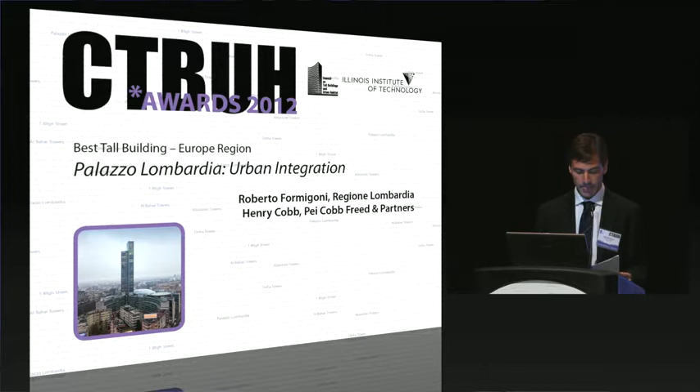Allow me first to say a few words about the region I belong to, the institutions that promoted the realization of this project, the Lombardy region. In this slide, you can see the key points, the key factors of our region.

We have a population of 10 million people. We are a region with a strong economic system. We have over 800,000 companies and about 18,000 foreign companies. The GDP of Regione Lombardia is 20% of the total GDP of our country, Italy. And the region of Lombardy is the leading region in Italy for external trade relations.

These key factors are important because in this context was developed the project we are now presenting. In fact, when we decided to create a new headquarters in 2002, we thought of a building that summarizes the characteristics, the features of our territory.

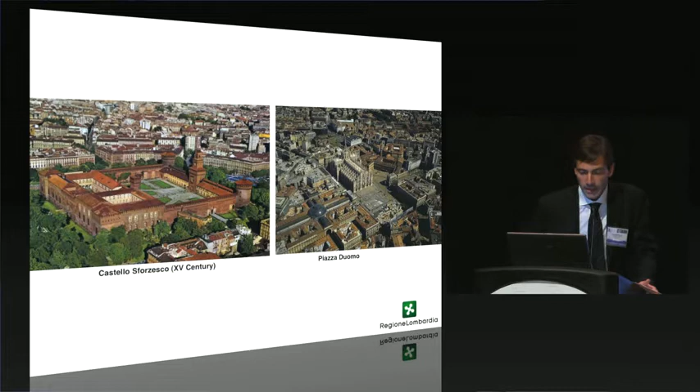Now, coming briefly to the area in which Palazzo Lombardia is located. This area is called Garibaldi Repubblica. It's an area very central, very close to the central station in Milan, and located between two historical districts of Milan. Unfortunately, this area where the building is now located had been abandoned for more than half a century.

So in our idea, and this was expressed in the manifesto, the project of this new building had to be a starting point, a focal point for a complete renewal of this area. We would like to create a building of great quality, a beautiful building, one that could launch this area for other important projects.

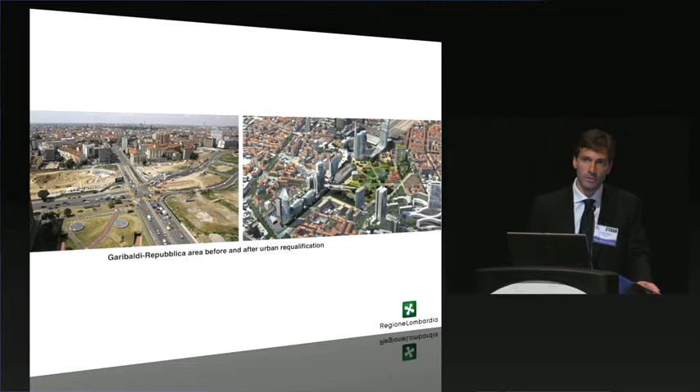Coming to the aspect of the green in Palazzo Lombardia, another important item that we inserted in the manifesto we wrote, including all the criteria. Mr. Cobb will explain this in a more detailed way, and of course in better English than mine. But I would like only to point out that as we would like to reflect our region in this building, we would like also to reflect our deep respect for environmental themes.

In our intentions, the new building had to be an example of the most advanced green practice in both design and operations. We chose technologically innovative solutions, and we would like to create a building that could be a model of eco-sustainable architecture. These innovative technological solutions include: active climate wall, photovoltaic cells, green roofs, and heat pumps using underground water.

We think that in Palazzo Lombardia there has to be a symbol of what we consider the environment, something to protect, but even a strategic resource. This is, for example, the purpose of the linear public park on the west side of Palazzo Lombardia. In this park, we tried to have symbols of the entire territory of the region: water pools represent our lakes, tree-covered mounds represent the alpine foothills, and we put 9 large rocks as symbols of the beauty of our mountains, the Alps.

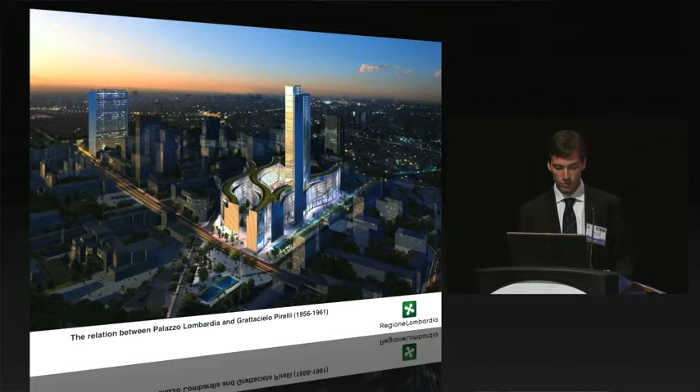Here you see the image of Palazzo Pirelli, the old headquarters, destroyed by an accident that occurred in 2002. Now the building has been completely restored, and it is the place of our regional council, the legislative body of our institution.

Palazzo Lombardia today plays a fundamental role in the city. There is a debate in Milan between those who believe this building does not belong to the Italian tradition, and those who appreciate this experiment. What I can say is that Milan, as I have already explained, has other experiences of tall buildings, for example the Pirelli skyscraper and even Torre Velasca. Milan is now changing, and in the near future the city could have a skyline like this.

But it's important for us to point out that our project is not important only for the view we have from the 39th floor. Here you see the last floor of Palazzo Lombardia. It's important because it is a way to leave an area, a city, more livable, a way in which we tried to help the city better improve its condition, and to offer places for citizens to meet the administration and to meet together. Thank you for your attention.

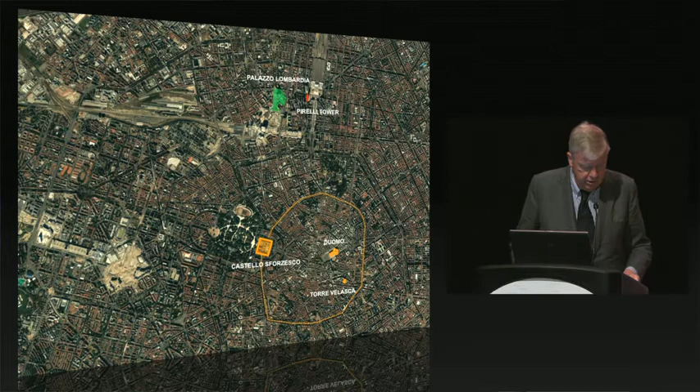Good afternoon. In this aerial view of Milan, we see the site of Palazzo Lombardia in relation to the key monuments mentioned by Mr. Pacca. As he pointed out, the site is located some distance from the city's historic center, in a long neglected district that is nonetheless remarkably well served by public transport, and therefore well suited to the current program of sustainable urban regeneration in which Palazzo Lombardia plays a central role.

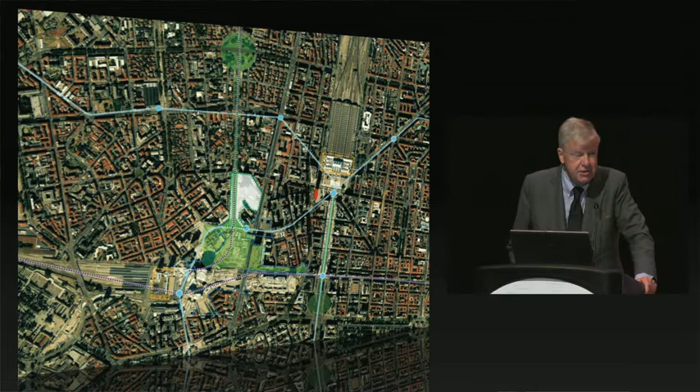The rather disordered arrangement of neighboring residential buildings is the natural result of a confluence of unrelated street grids, with none achieving clear primacy. The challenge then was to envision, on this oddly shaped urban site, a work of architecture that could provide nearly 90,000 square meters of floor area above grade, while also shaping attractive public spaces and fitting comfortably into a neighborhood of mid-rise buildings.

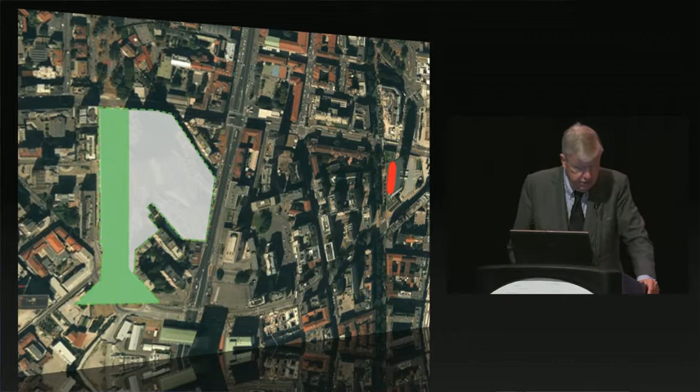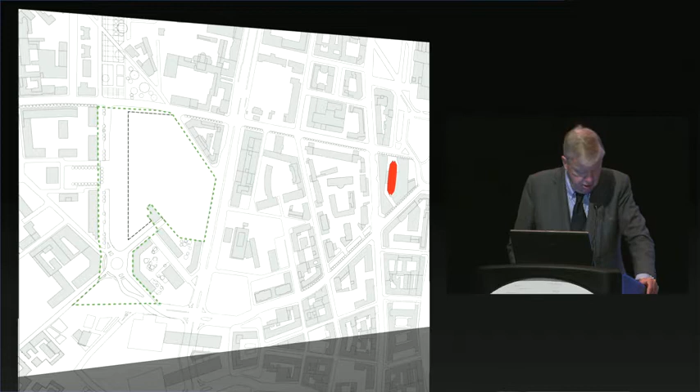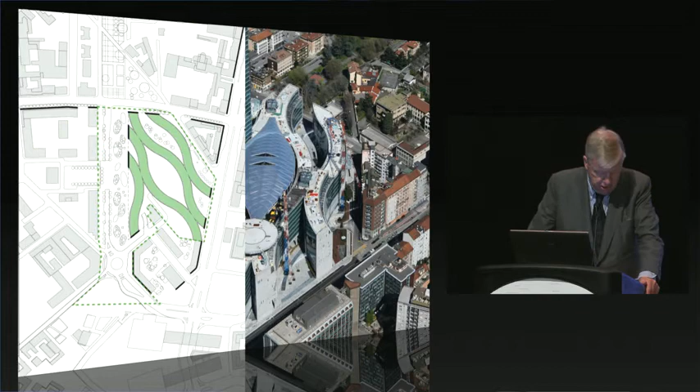We began by imagining a podium structure comprising sinuous, interweaving strands of linear office space, 7 to 9 stories high, whose modest scale relates well to the adjoining residential neighborhood, while their curvilinear forms make reference, here in the heart of the city, to the mountains, valleys, and rivers of Lombardy.

Although seemingly random, these strands are actually the highly disciplined products of a geometric order made up of 22 circles arranged to form 11 intersecting rings.

Fragmentary arcs embedded in two of these intersecting rings then rise to form a slender bifurcated tower. At a height of 161 meters, the tower contributes an emblematic presence on the skyline that is explicitly complementary to the neighboring Pirelli Tower, heretofore the tallest building in Italy.

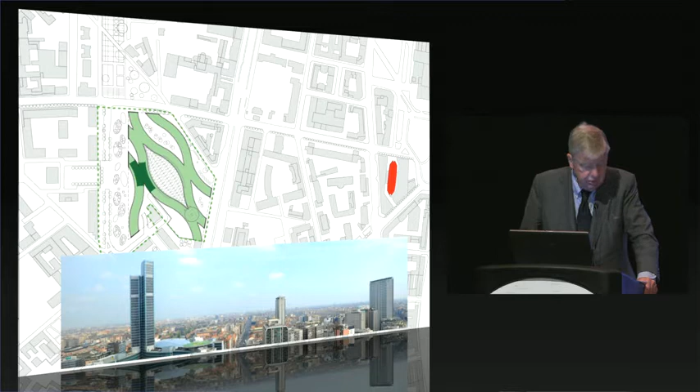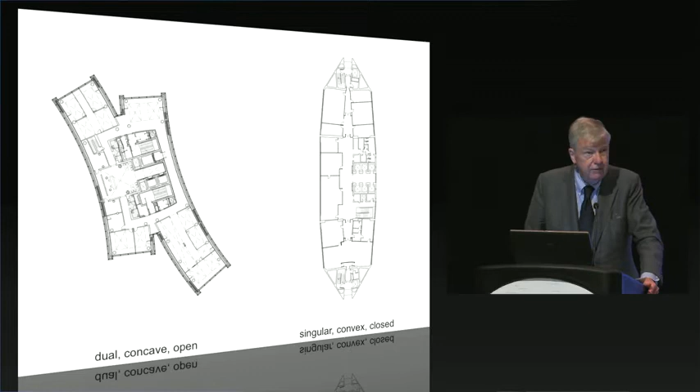Whereas the form of Gio Ponti's great work is singular, convex, and closed, the new tower engages it in conversation with a form that is dual, concave, and open. While the former meets the ground as a solid shaft, the latter virtually dissolves into the curvilinear strands of the podium below.

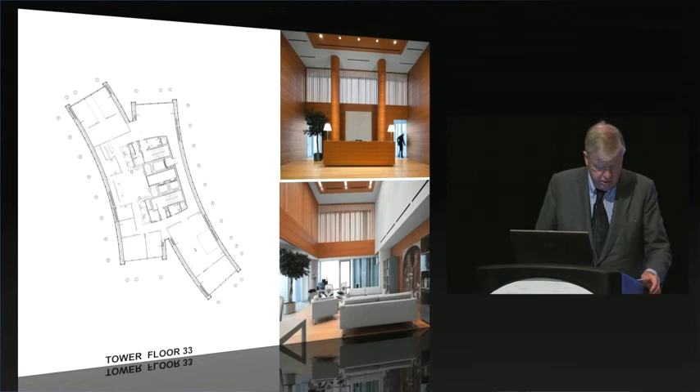Let's look for a moment more closely at this tower shaped by intersecting arcs. Its upper floors comfortably house the offices and reception rooms of the president and other senior executives of the Lombardy regional government, while its lower floors, just above the podium, are dedicated to conference and reception rooms.

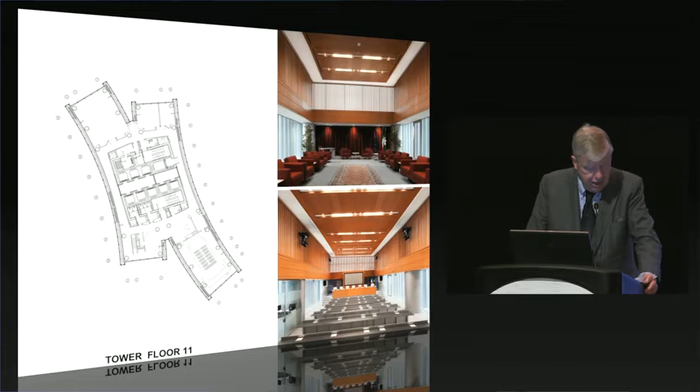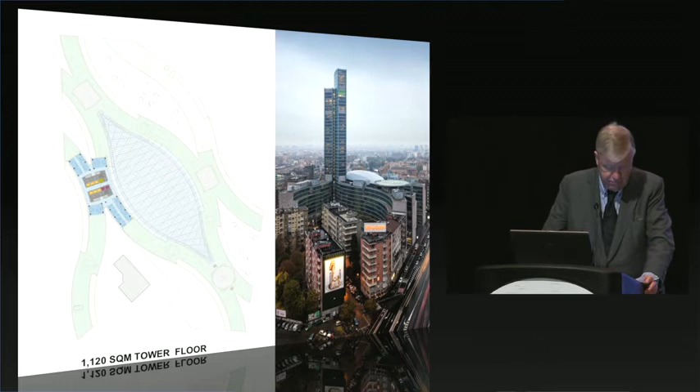Nine floors above the street, a major transition occurs from the exceptionally small tower floor plate of just 1,120 square meters to the podium floor plate of 12,500 square meters, surely among the largest of any office building in the world, where the interweaving strands are responsive not only to the urban condition of the site, but also to our clients' need for space that is exceptionally flexible and hence readily adaptable to the evolving organizational structure of the regional government it will house.

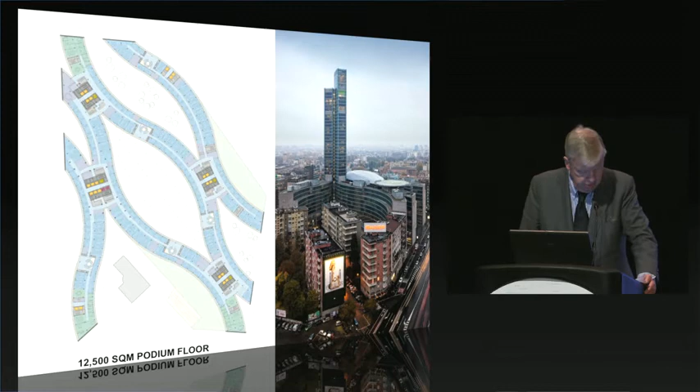This view shows how the tower rises naturally from the interweaving strands of the podium, and how the podium in turn meets the street, with the end walls clad in stone so as to fit in harmoniously with neighboring residential buildings.

I am especially fond of the stone employed in these walls, which is called ceppo. It is quarried only in the Lombardy region and can be seen in many notable Milanese buildings, such as Muzio's Ca' Brutta and Portalupi's Villa Necchi.

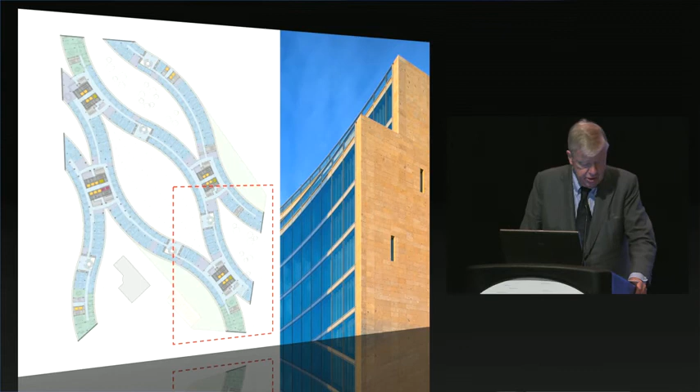Isolating now a section of the podium building to take a closer look at the interior, we can see that the 14-meter wide office floors are consistently laid out with smaller private offices along the concave sides and larger group workplaces along the convex side.

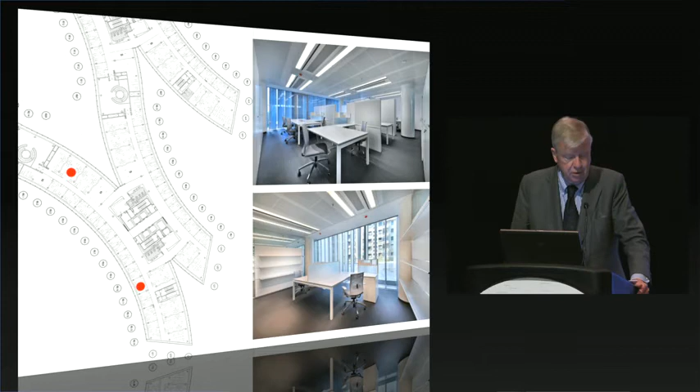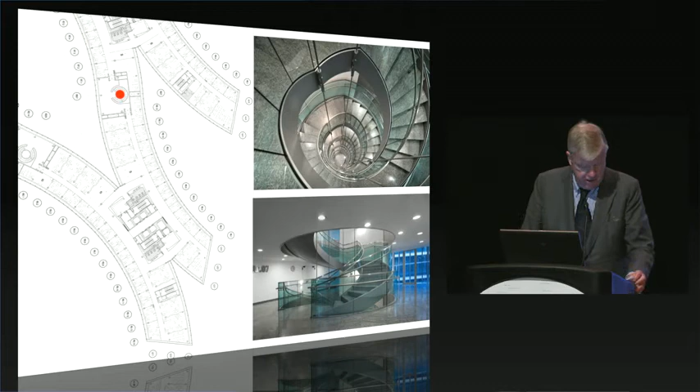At each point of inflection in the curvilinear strands, a spiral stair facilitates circulation between floors, and at each point of contact between two strands, there is an entry lobby flanked by elevators and service spaces.

Looking once more at the entire 12,500 square meter floor plate, we can see how, in addition to providing clear and convenient points of access for staff and the general public, these circulatory elements also create almost limitless flexibility for rearrangement of government departments over the life of the building.

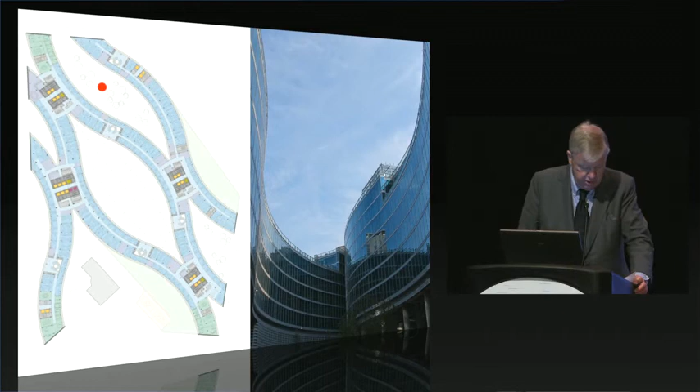On the right, we see one of the open spaces shaped by the interweaving strands of the podium office floors. And here we see how the stone end walls dramatize the encounter between those strands and the surrounding city streets.

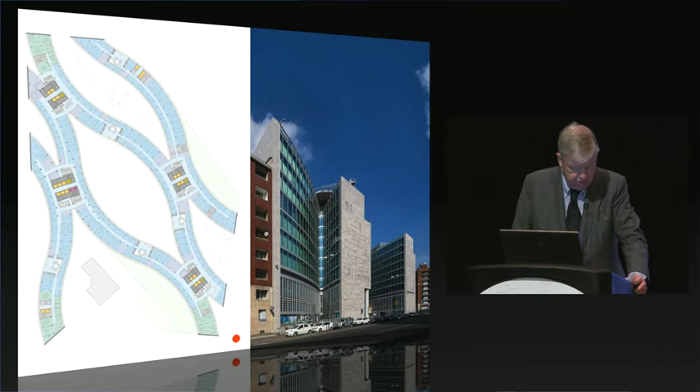It's also worth noting that our design concept made it possible for the hold-out apartment house to remain in place without compromising the functional and architectural integrity of Palazzo Lombardia.

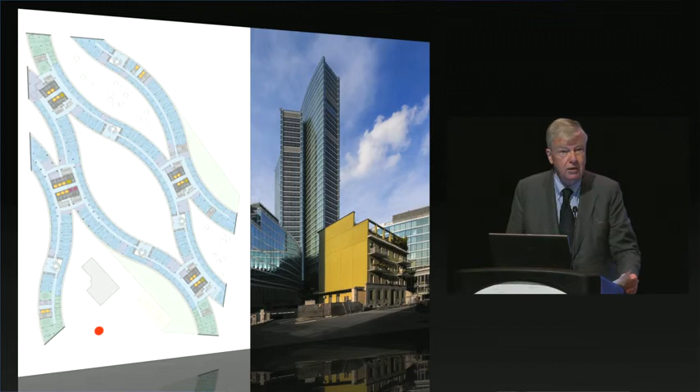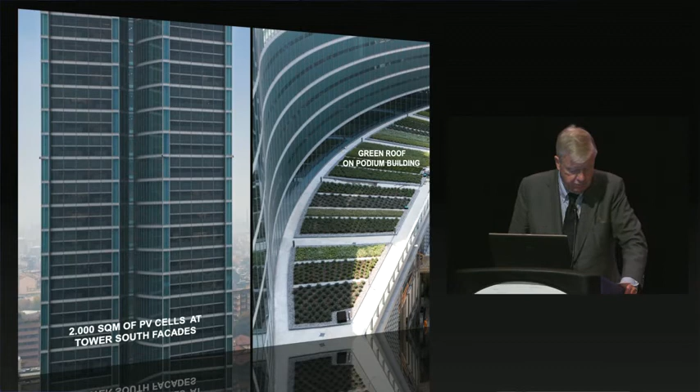As a committed environmentalist, President Formigoni was insistent that Palazzo Lombardia incorporate the most advanced green practices in both design and operation. Sustainable features visible from the exterior include large areas of green roof on the podium and an array of photovoltaic panels embedded in the south-facing glass walls of the tower, all the way from top to bottom.

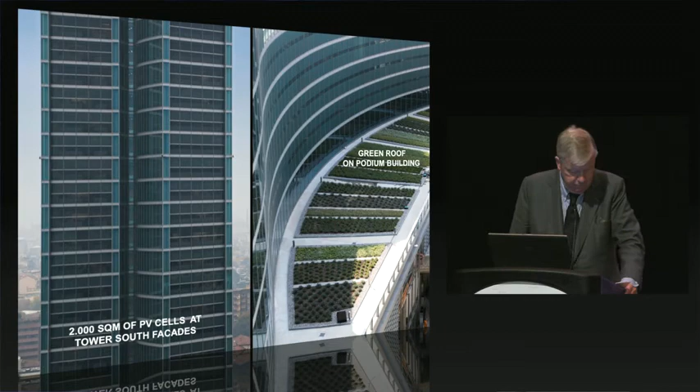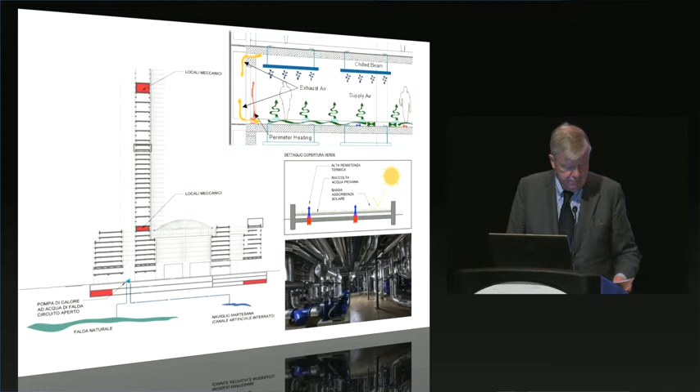But of course, many important green building elements, such as the heat pumps using underground water, remain hidden from view. And I sometimes think this is a pity, as these works of engineering are often quite beautiful.

In terms of its influence on the architecture of Palazzo Lombardia, by far the most significant green building feature is the active climate wall enclosing the curvilinear faces of the office floors in both podium and tower.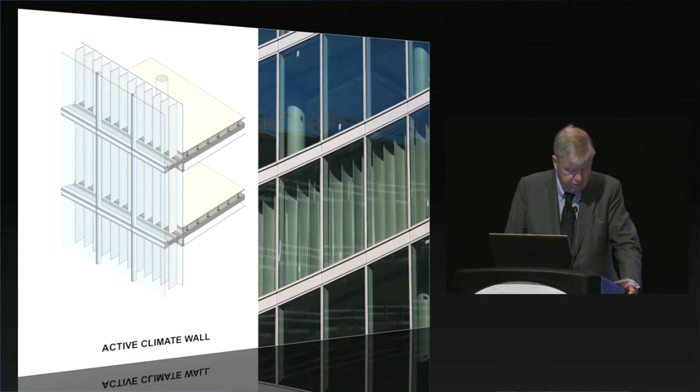One meter wide cavities between the inner and outer layers of glass houses retractable vertical blinds that rotate to provide shade from the sun while maximizing transparency of the building envelope.

As the detailed section shows, air is drawn from the interior into this cavity, from which it is then recirculated with the addition of fresh air, a system that provides exceptionally effective and energy-efficient climate control for the office spaces and their occupants in all seasons.

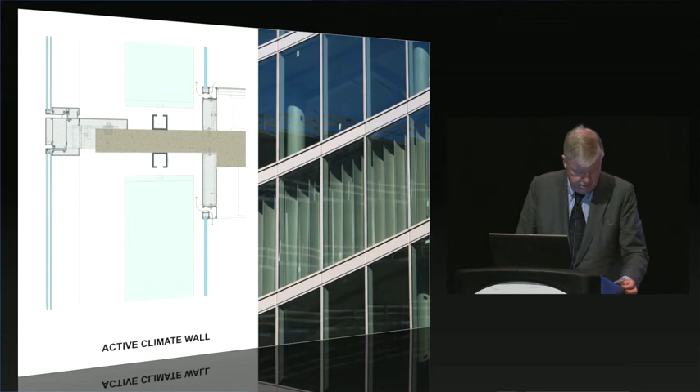Exemplary as it is of green building practices, Palazzo Lombardia equally embodies the regional government's commitment to social as well as ecological sustainability in contemporary urban development.

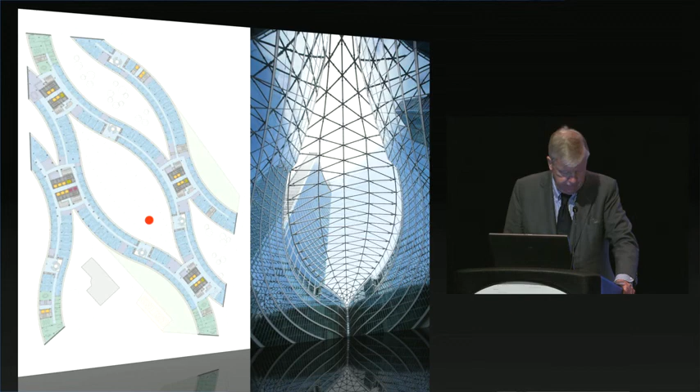To fulfill this commitment, a central public open space, Piazza Città di Lombardia, is sheltered by a transparent ETFE roof so as to be habitable in all weathers and all seasons.

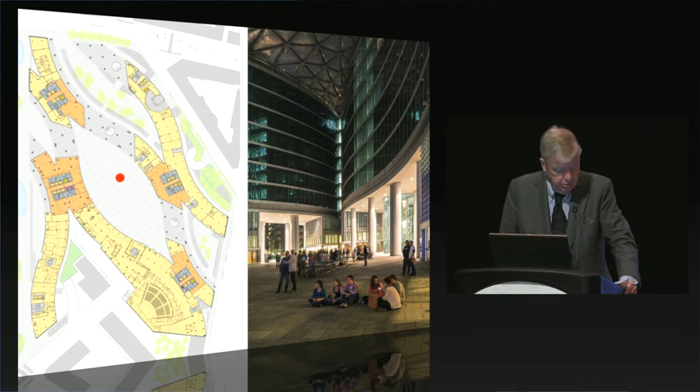This major gathering place, made memorable by the curvilinear walls that enclose it, is open at ground level in all directions to the surrounding city, from which it invites entry through generous landscape passages shaped by the curvilinear strands of the podium.

Complementing this permeability, the ground floor of the building is enlivened with shops, restaurants, galleries, and a large auditorium.

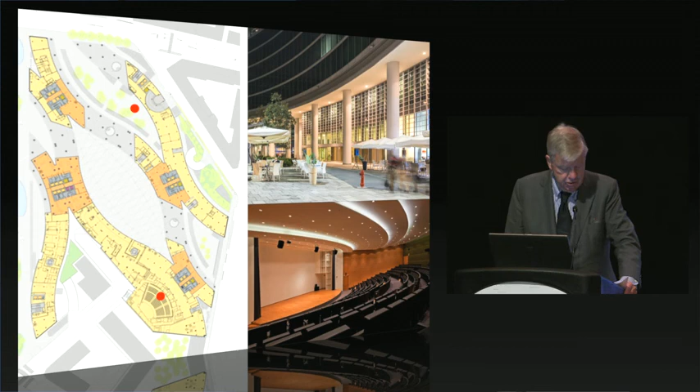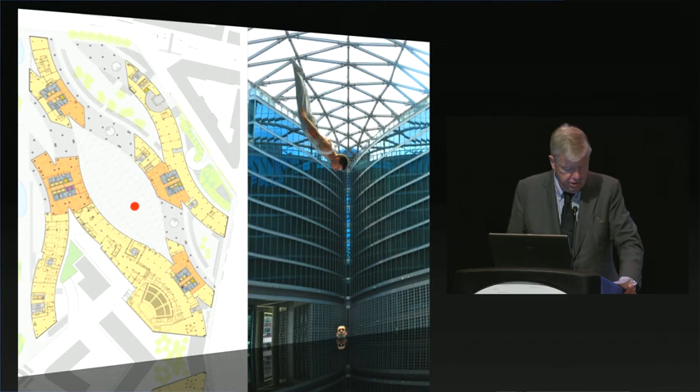The piazza, which is open 24 hours a day, 7 days a week, has already proved hospitable to a great variety of activities, as Mr. Pacca mentioned, be they ceremonial, celebratory, athletic, promotional, cultural, or simply casual.

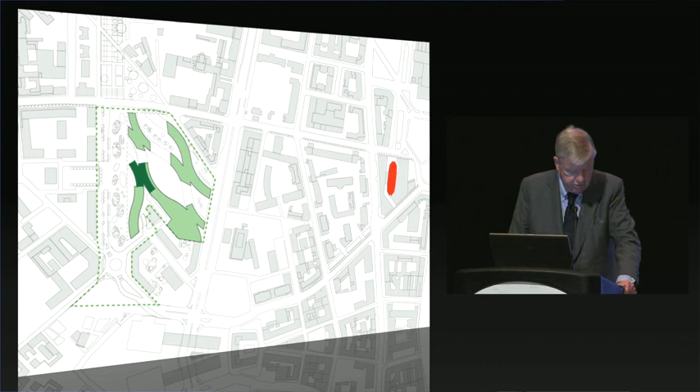Finally, if we now place the ground floor plan of Palazzo Lombardia into its larger urban context, we can see how the concept of interweaving strands has sponsored a formally coherent transition from tower above to podium below, and thence to the sequence of street-level open spaces that join the central piazza seamlessly to the city around it.

The transfiguration thus accomplished, from emblematic object on the skyline to emblematic space at street level, is, in my view, the most important contribution offered by Palazzo Lombardia to the advancement of critical thinking about tall buildings in the urban habitat.